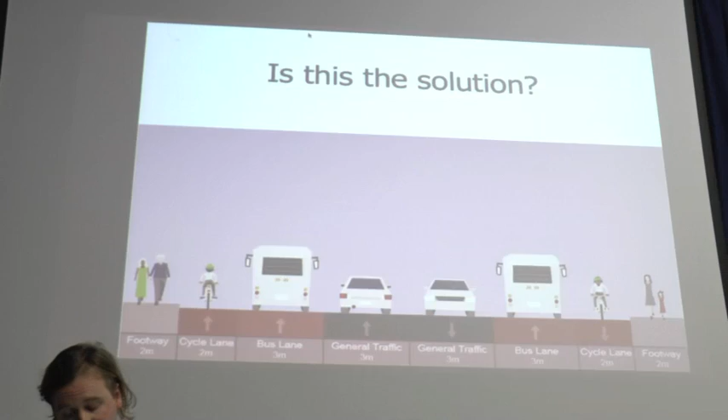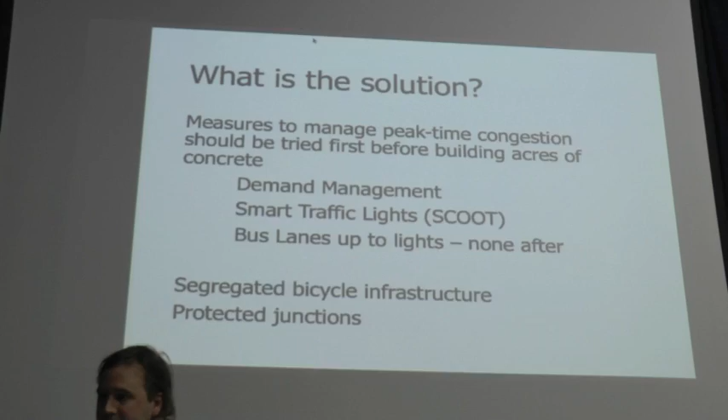It's very bus and car dominated. So the first thing is really about putting in place measures city-wide to manage congestion. Edward's going to speak about some of these things - demand management, smart traffic lights about how we can control the flow of traffic between junctions, bus lanes and so on. But there's 2 points I want to make on demand management.

First of all, we think there's a lot that Stagecoach could do to improve the way buses come to bus stops and so on. We've been pressing for over 12 years now for Stagecoach to implement some kind of on-street ticketing, so that rather than the situation where a bus comes up and everyone's sitting in the bus while everyone is having to pay, you can actually pay before you get on the bus - with cards and so on.

It's ridiculous in this day and age that we still have the situation where people are having to wait 5 minutes, and of course what it means is the buses are very slow, because if you're trying to do an overall journey, you're having to stop each time. If anyone's been in London, you know the massive difference - you can get on a bus and it goes off straight away. Last time I was there, I measured at a bus stop, 20 people got on in the space of 17 seconds. Can you imagine that in Cambridge?

So what we're saying is there is a quid pro quo here. If Stagecoach and other companies want things like bus lanes, they have to do their part as well. The other big benefit of on-street ticketing and paying before you get in is that it massively increases the capacity for buses in the city centre. Because if a bus is waiting in the middle taking fares for 5 minutes, that's 5 minutes where that bus is taking up that space in the city centre. If a bus can go into the centre, get people and drive out, there's a lot more capacity for buses. So there's that quid pro quo.

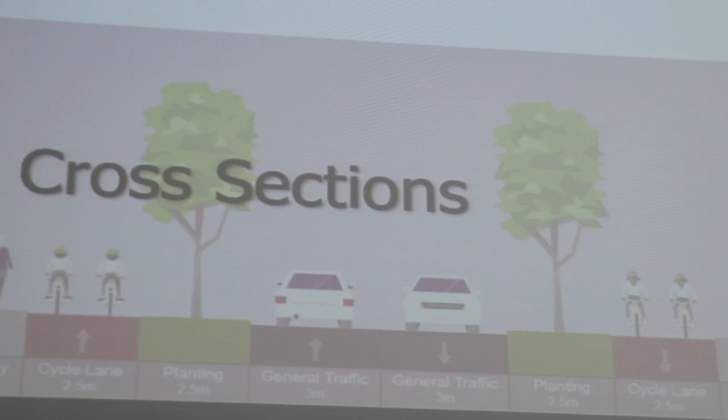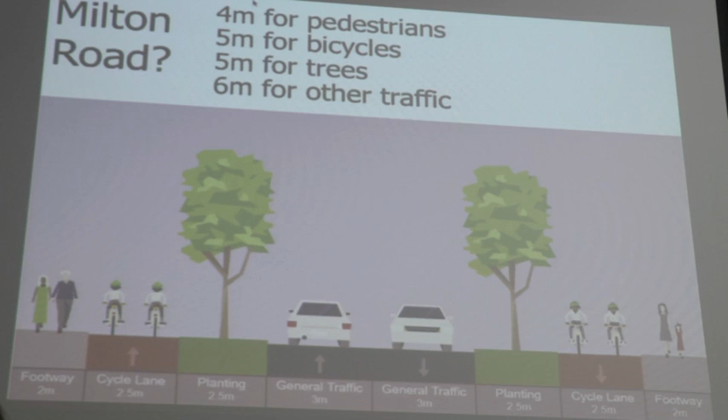My colleague Robin, who actually created this presentation, has made some cross sections of how we think Milton Road could be. We've got a footway, a cycle track, trees on either side, and 3-metre traffic lanes - that's without a bus lane, we'll show you a bus version equivalent. We think this would be a much better way of getting a lot of people down through Milton Road.

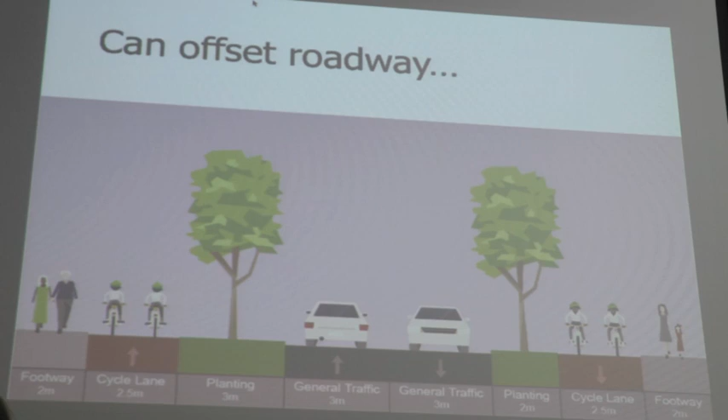We can make planting on one side larger if you wanted, but if you needed car parking or car storage, we'd like to see cars - if they're going to be on the public carriageway, they probably shouldn't be stored there for hours and days at a time. You can intersperse one side of the trees with the parking effectively, so you'd have a tree, then a parking space, and so on. That picture shows a similar kind of thing - you wouldn't even need to lose parking, and yet you can have trees as well.

Moving on - no shared use, 2.5 metre cycleways each side, priority at side roads so you continue over without having to give way all the time and stop, which makes it very slow, and protected junctions, which I'll talk about now, and also the removal of rat runs. Rat runs are a big problem, but they also encourage people to drive when in fact they could be cycling otherwise.

So what's a protected junction? I'll show you a little video. A protected junction is an idea from North Europe - the idea that bicycle traffic is completely separated from motorised traffic in both time and space at a major junction, and pedestrian traffic too, so pedestrians aren't mixing with bikes. You have a separate bicycle and pedestrian phase, and all the bikes go at the same time as the pedestrians. This is the kind of intersection you really have to have when you get up to the 40-50% level of cycling that we think is entirely achievable in this city.

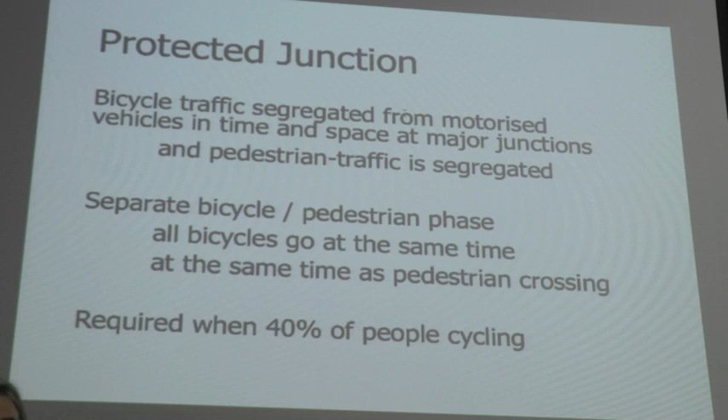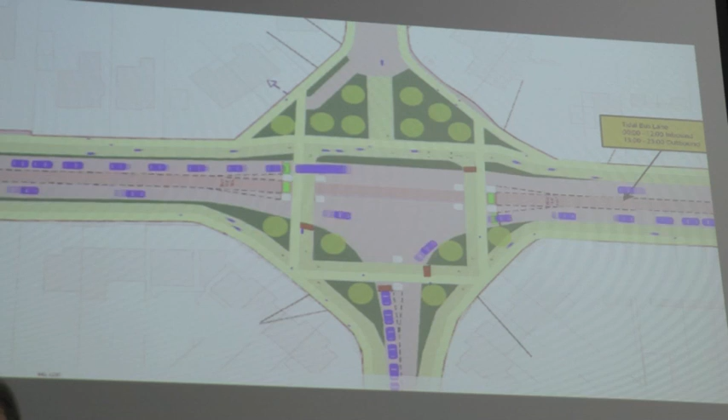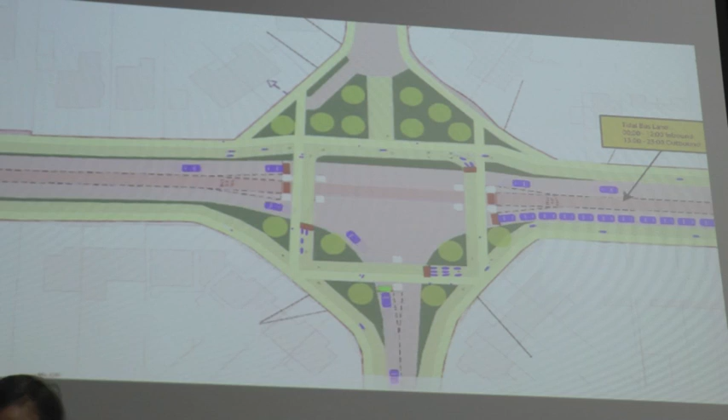And we've shown here an example including a tidal bus lane. The idea is that before midday there'd be a bus lane going into town, and after about 1 o'clock, so there'd be a dead period of an hour, after 1 o'clock until the end of the day, the bus lane would go in the opposite direction.

Surely it's technologically possible to make sure that buses at other ends don't both start in the bus lane these days. Maybe Stagecoach can fix that one as well.

But the key point about a tidal bus lane is that, as I said at the beginning, it's not really the bits between the junctions that are the problem. It's actually at the junctions. And with modern light technology, you can hold back the traffic.

You can effectively synchronise the lights so that when a car comes in, if they know there's a bus needing to approach from behind, they can hold the cars and allow the bus through, so the bus has a free run of the traffic. In other words, you wouldn't need a bus lane all the way along the road, just as you approach the junctions.

So that's the idea of a protected junction, and I'll skip through the slides which have all the details of it. Just to finish off, so you could achieve a bus lane.

Again, you've got the space on Milton Road, but it would only need to be used by express buses. The problem is, when you get to a bus stop, it'll only be the local buses that actually need to use that.

We've got some process for closing rat runs. If you're going, for example, between Castle School and Haymakers, currently you've got three options. You've got Ascham Road, which is a rat run at the moment.